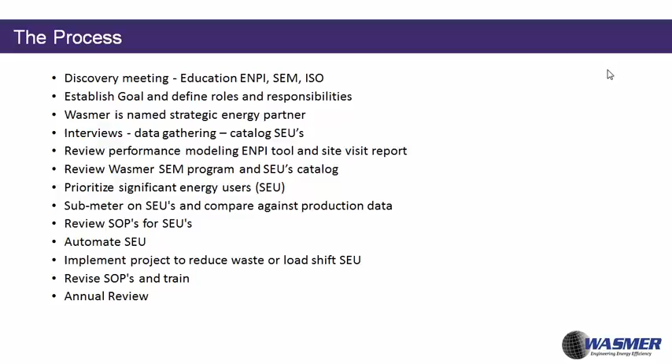So real quick, the discovery meeting is in your facility. We want to look at the energy being consumed in your facility and be able to tell you about your operation. So when we're implementing strategic energy management, we need to inventory the energy uses.

We need to associate the energy use to production process and facility layout. We need to designate significant energy users for what they are, understand the opportunities, look for new performance improvement opportunities, and create a process for maintaining energy review.

Let me just skip over this. This doesn't really matter, but essentially the bottom line is if we do all this work for a client, we need to be named the strategic energy partner. Essentially all that means is we would be your outsourced engineering and implementation group.

What we could do for you is we have a process where when we create projects later on, it has full transparency. You see every invoice, every credit, because it's based on a cost-plus program. No different than if you were having your maintenance department put this stuff together, you're going to have these costs. But instead of paying for the maintenance department personnel to implement it, we're using the cost-plus program.

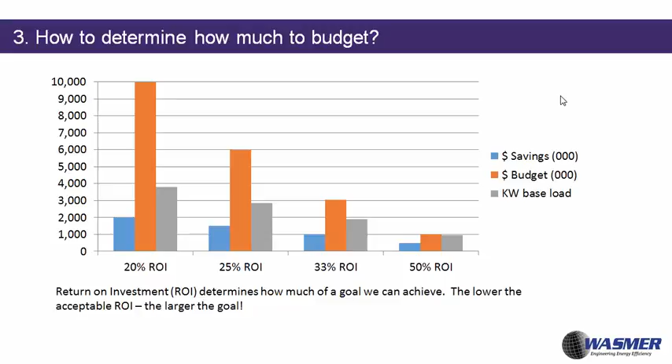To be able to figure out how to act and prioritize stuff, we need to interview a lot of people. We even go as far as asking to attend your new employee orientation. It is the one time, and the only time, a company usually gets to push its message out to the entire group, is when they're first hired. We want to make sure our program aligns with the company's mission and message, unfiltered through years of experience in the corporation.

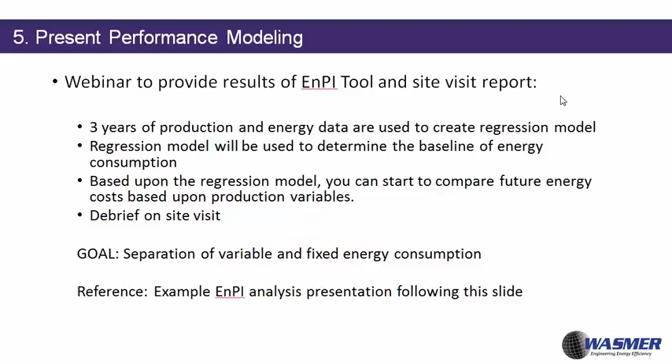We want to be able to present to you our performance modeling, present the 3 years of production energy data, how it relates to each other, find out what is baseline, what is variable. I keep talking about variable and baseline because it's really crucial - it's the only way to verify we can hit goals.

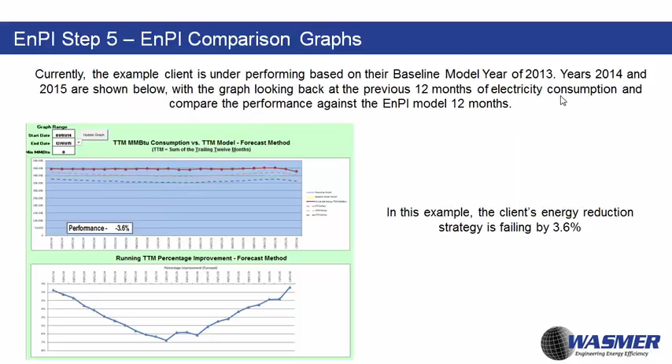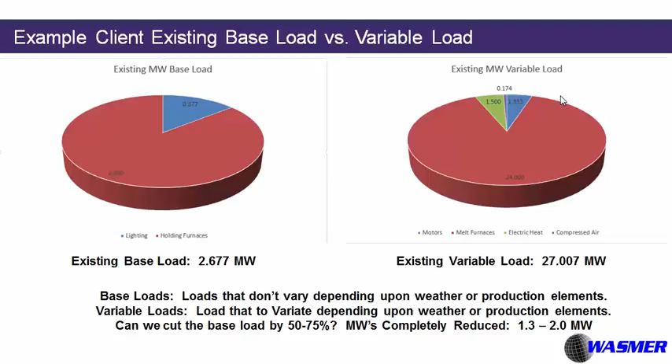Here's the EnPI tool, digging a little deeper once we have more information. Having the regression graph - it is pure statistics, but boy, is it accurate. Once we have that and we've cataloged everything, we can present those findings to you and determine where our goals should be, and how we're going to achieve it.

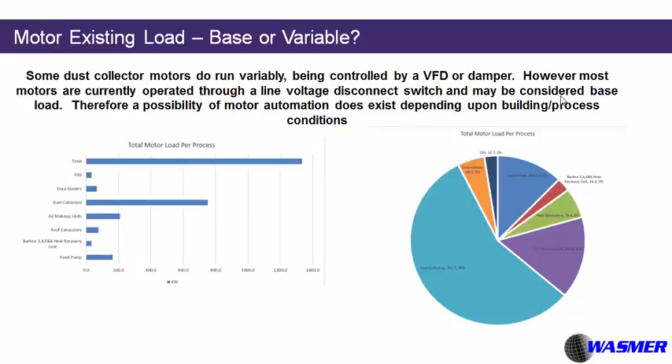If we have to do any power monitoring, more than likely you have more than enough already, but sometimes we're not using all the features on the VFDs, for example. Being a Rockwell Automation integrator, we try to use more of the information you already have in your facility.

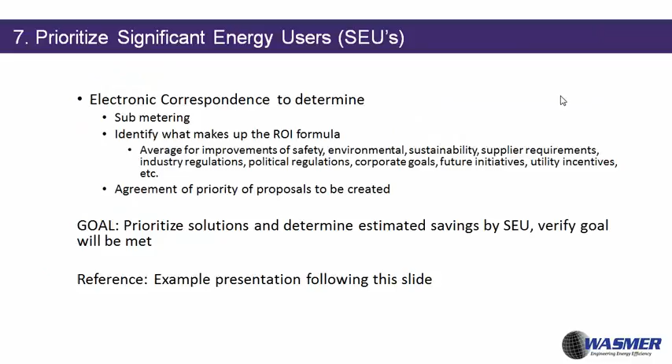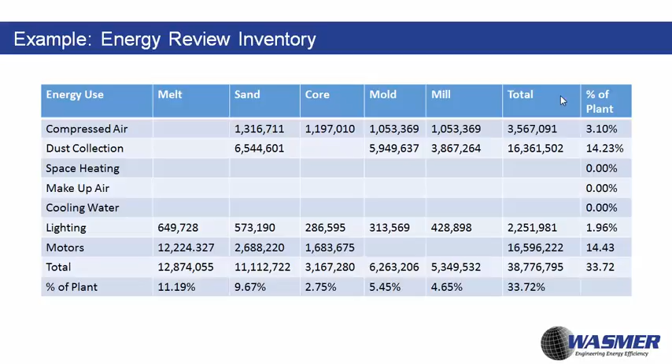Here's a review of the SEUs, here's an example of it and how much we relate it all back to kilowatt hours, reviewing that information, reviewing the standard operating procedures for those SEUs.

Sometimes we're finding out that equipment is being used inappropriately, so nothing has to be done differently other than to re-educate the employees operating it and rewrite those standard operating procedures.

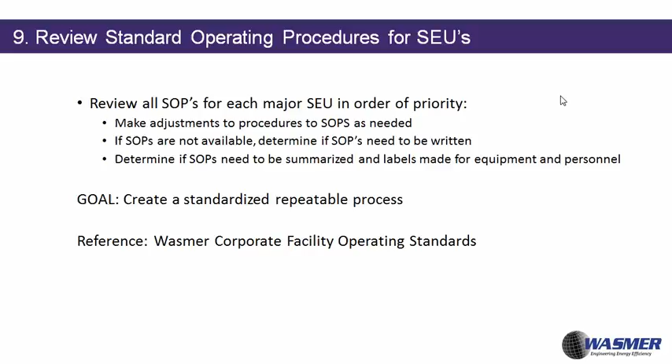If you don't have standards, I'm going to highly encourage that this is done during this process, during this stage, for us to write those standards so that moving forward, this SEM program does not live and die based on if we're involved or not. I want this thing to grow, I want this thing to mature and be sustainable for many years to come.

We want to automate those SEUs. There are so many times, be it dust collectors, furnaces, hydraulic pumps, that are not integrated, they're not automated, and they're running for no reason.

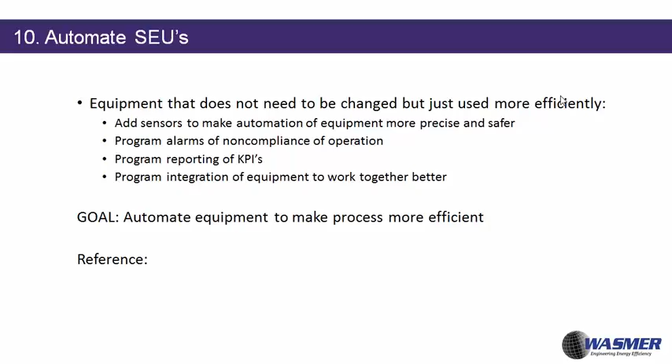You'll notice here we have KPIs, and you probably have some of those KPIs, but we do some different things unique so that you know daily if you're going to meet those KPIs for the month or not. That's through alarms and reporting via text and email to let you know if things are out of parameters or not. So that one is very exciting.

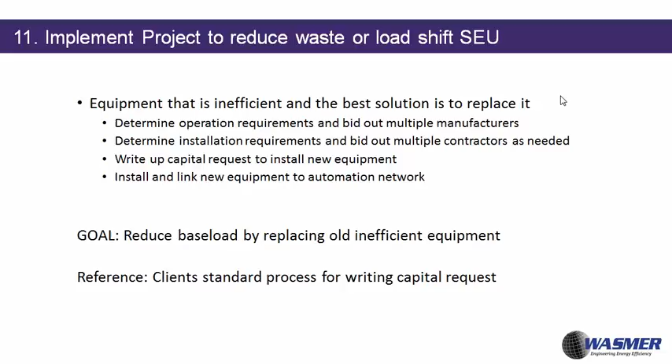Here is where a lot of people get started with their energy reduction goals, and you'll notice this is step 11 - this is not step 1. To do a really good job and prioritize and do these projects in order, we need to have enough due diligence. At this point is when we can start implementing the projects.

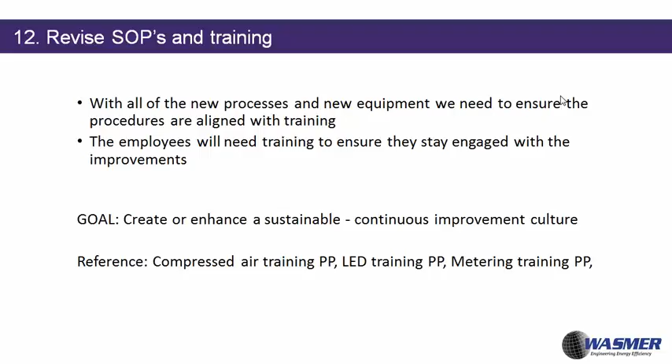The rest is really quick because we train the employees after the fact how to use it properly, revise those standard operating procedures, make sure it's being operated correctly moving forward, and then do an annual review to make sure we're on track. Be it a 3-year agreement or shorter or longer, it doesn't really matter. Annually, we want to review, make sure we're on track, and then learn from it and repeat.

The next stage, if this intrigues you, would be for us to come in for a discovery meeting, talk to you about it. More than likely you have energy teams - we'd love to get everybody together, quiz each other, talk war stories, and see if we can help each other. It doesn't fit for everybody, but we find that the clients who allow us to act like a trusted employee, we're able to get a lot of results, achieve those results, and get a lot implemented.